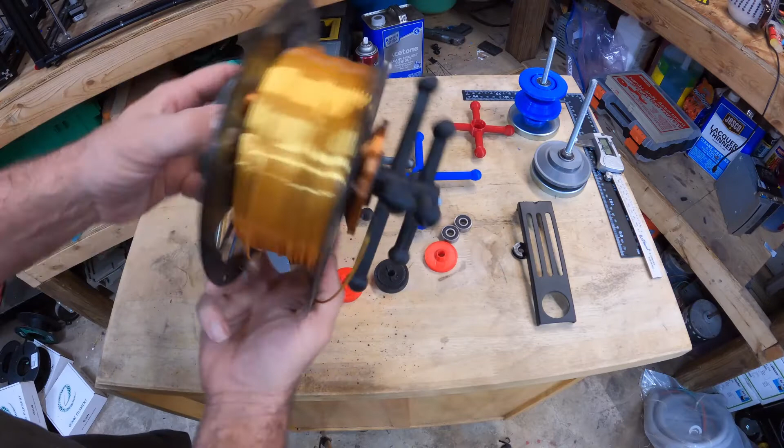So first what you see here is basically you have 3 bearings, skateboard bearings, and you have 2 spools, an inner and outer. Then you have a trim ring that holds the bearing in, and then you have 1 or 2 nuts depending on how you want to do it.

So basically, if your spool is going to unroll counterclockwise, then you need to have the second lock nut on here. What that'll do is prevent this one from unwinding. However, if you are pulling clockwise to your machine, you really only need 1 nut, and that's going to be important if you own the Plus, and we'll get to that in here in a second.

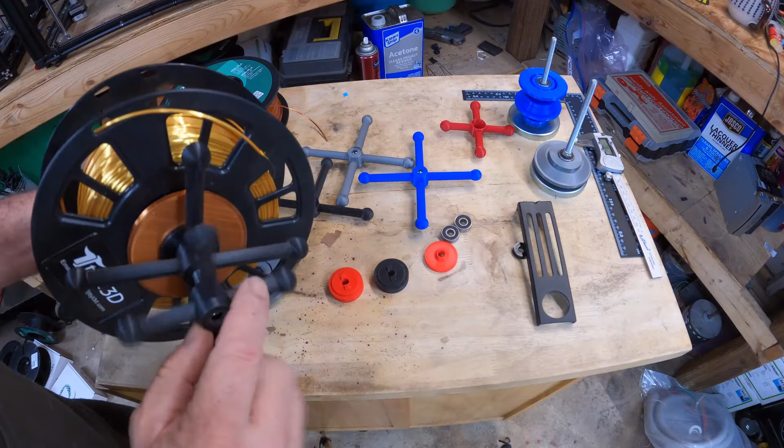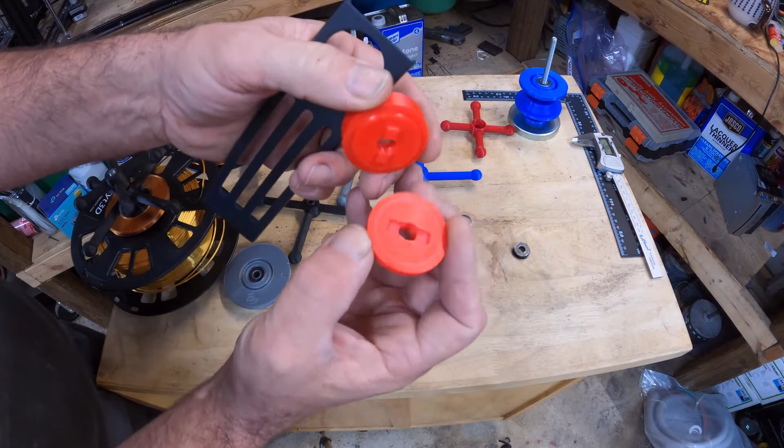So the parts you have here are, now you have the option of using this on a magnetic like I have, or on the OEM bracket. If you use it on the OEM bracket, you're going to have 2 parts. You're going to have this part and this part, and what they do is they interlock right here.

And this is not sized properly. The lip is too big, but the one you get has already been adjusted. But basically you will stick this right here, and you will put that right there, and then this will smush.

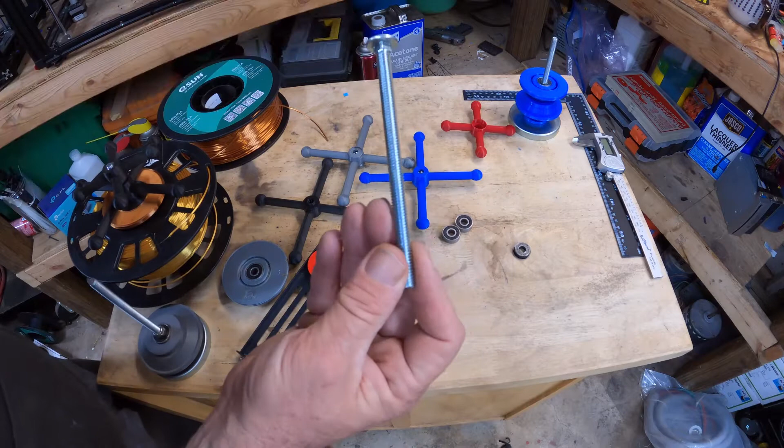And the way that'll smush is... let's back up here. So these are your lag bolts that we're using. It would be nice to have a hex head, but a lot of the ones that you find with hex heads are not threaded all the way down. They'll just be threaded on the end.

So if you're using the OEM version, not that big of an issue. It kind of fits in. You can just hold this, tighten it down, and if you look, you'll see we're using a nylon nut with a nylon stop in it.

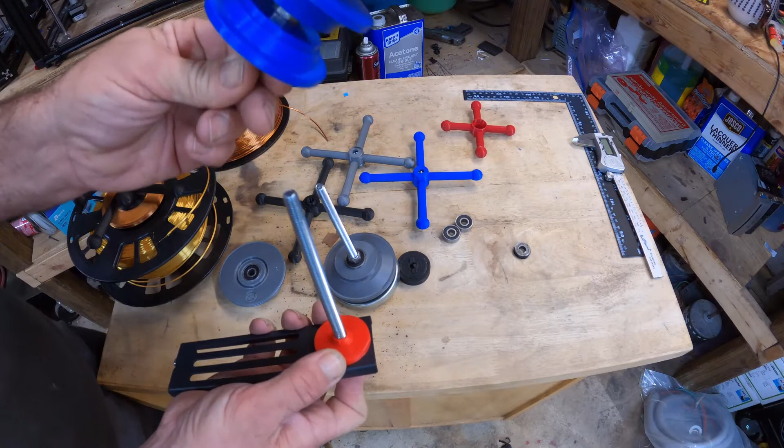If you are using it on the OEM mount, you will just put together these 2 pieces, and then you will go ahead and put a nut right here. Or you don't necessarily have to put a nut here, like I have on this one. Well, you can do it more like I have on this one, where you see I just have a piece.

This is a practice one. Your lip will not be as big, but you can see you can just go ahead and put your spool. So I don't have a spool here with 2 bearings, but basically the inner spool has a bearing on this side and this side.

So if you're doing the OEM version, you can just slide it on with your other bearing right here, and then put your nut on, and that'll sandwich it all together.

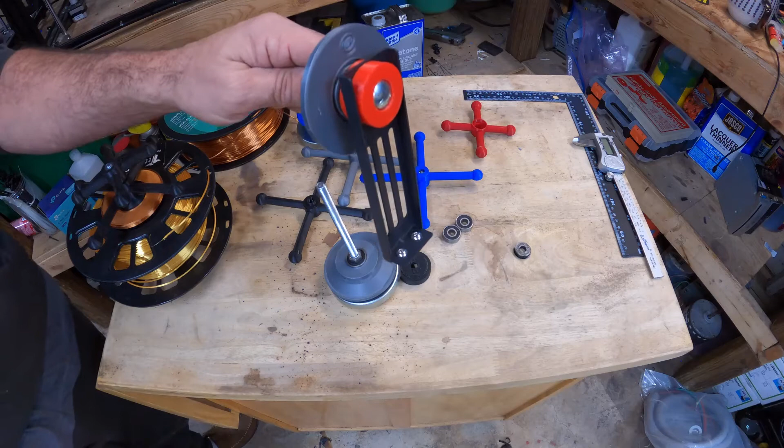Another thing about assembling these is the more you tighten this nut down, the more resistance there's going to be in this wheel. A little resistance in this wheel is probably not bad, to prevent, if the machine pulls on it real quick, you don't want it to keep

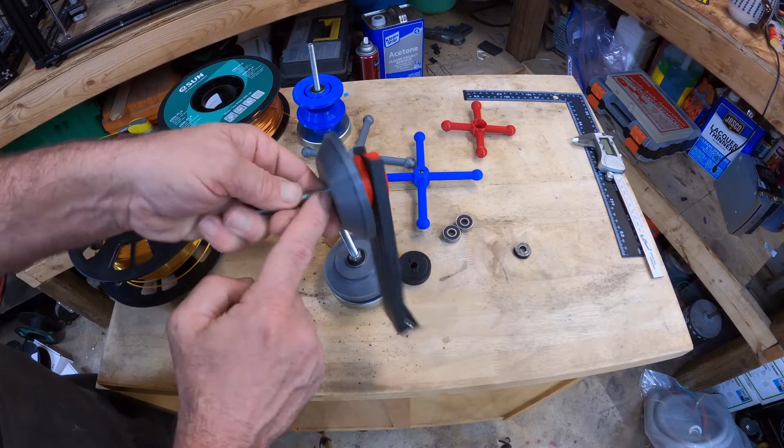unspooling the filament. So yeah, basically like this, and then you put your bearing in your nut. So there'll be a carve out on the inner for the bearing to recess down inside it, and then you put your nut. So there you go, that's your permanent part.

And then basically you'll have this, and there is a cover. I'll give you this one right here.

This video is coming down off track here. What do you want for a Monday morning video?

Alright, so you see, here you go, and there's a bearing in there, and this cap just glues on there to kind of hold the bearing in.

So you're just going to put your spool on, and this is a first generation spool that doesn't fit worth the crap. Let's just move to this one. So you'll see we fit right there, and we pop our top cover on.

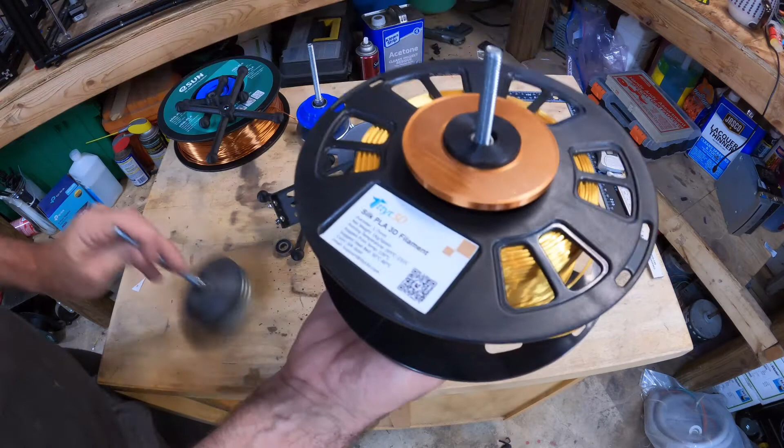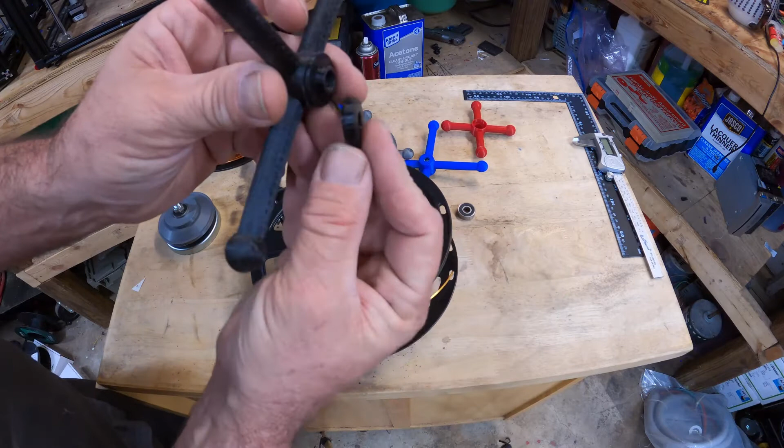Now if you look, some of the nuts, there's 2 different kinds of cap. There's a cap with a lip, and then there's a cap without the lip, and that's the way they're identified inside the folder. But this one right here, you want to have the lip go down. The lip will go down in here and push on the bearing.

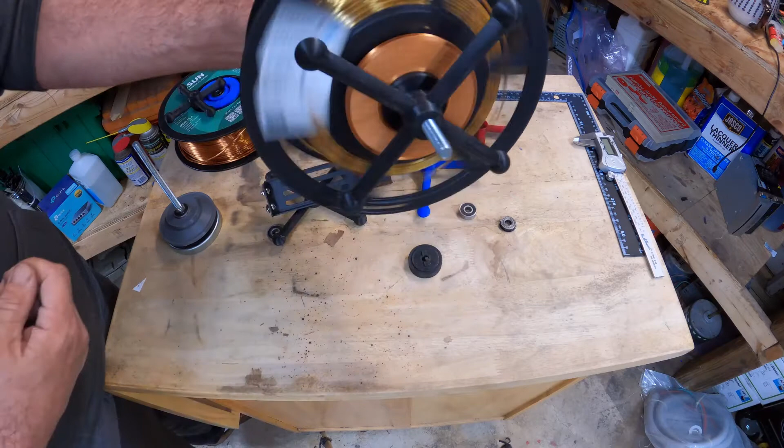And there you go. You'll see that if you don't get your bearing on there straight... and there you go, and it works pretty well. It's awesome, I love them. I have about 5 of these on my metal cabinets.

Okay, now let's back up here. So like I said, you could do it, but it's a little harder when the other end's not mounted. Just tighten up slow and wiggle a little bit when you do your last little bit, and it'll stay centered.

Like I said, if you're pulling counterclockwise, this is where you're going to want to put your lock nut on, and we would just put a lock nut on like this. This one doesn't have a nut in it. Okay, so that's just the particulars of how to assemble it.

Now there's a couple more things to consider here. One is how to print this stuff, and it's really going to matter on these. So we know that on this, we want the lip so we can go down inside of our trim ring. So when we print this, we are going to want to print this open side down, because the bottom side is going to be the ugly side a little bit where it touches the raft. And we'll give you some hints about how to print these here in a second.

Now I hate printing them like this because it makes it hard. You have to use some really good supports for the rest of this, and there has to be good density. Well, that makes it a big pain to get everything out of inside here, and you can see it can get torn up. We'll show you some tricks for that.

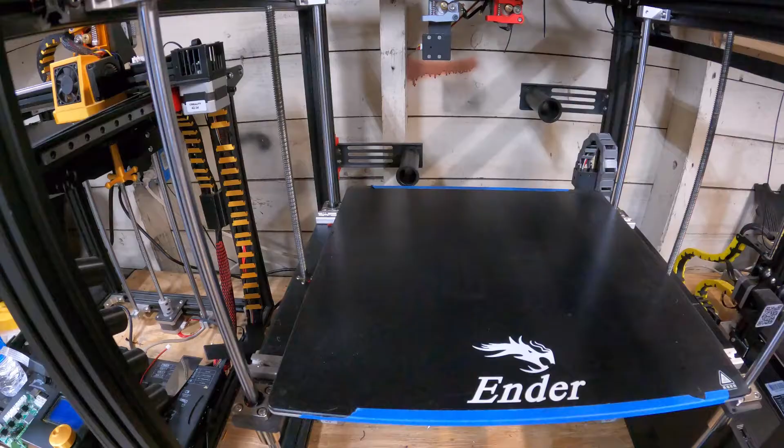Now a couple things to consider. This one requires a shorter lag. So this lag bolt right here for the one on the plus is 6 inches. The regular lag that we use everywhere else is 6.5 inches, so a 6 or a 6.5 inch. So the 6.5 inch will not fit here.

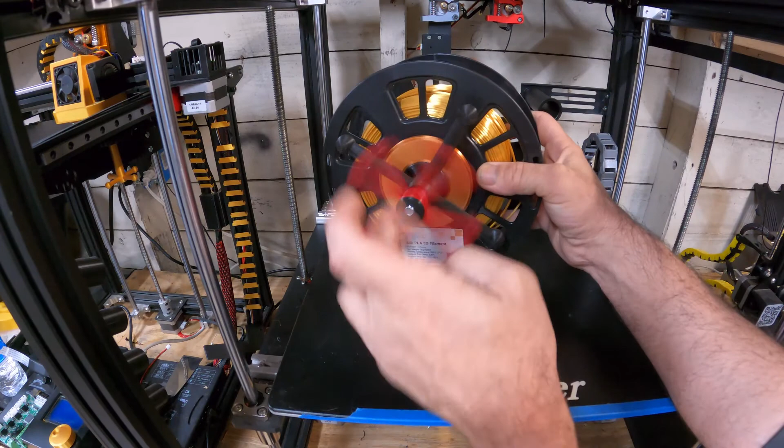I thought about adjusting this back and making this recess back the extra half inch to make it so... here's why it's a problem. With the shorter screw, you're only allowed to get one trim nut on here, right? You're only allowed to get the one nut because you're losing half an inch off the screw, and that makes it so that the second nut becomes a problem if you're winding this counterclockwise. They can unwind.

So the best thing to do on the plus for now is to make sure that your spool is feeding clockwise, so that any pressure on the nut would be to tighten it. So to do that, if we're going to do it here, we just move this extruder over, and we do the same thing over here. It's a dual extrusion machine, and we can do that on this machine.

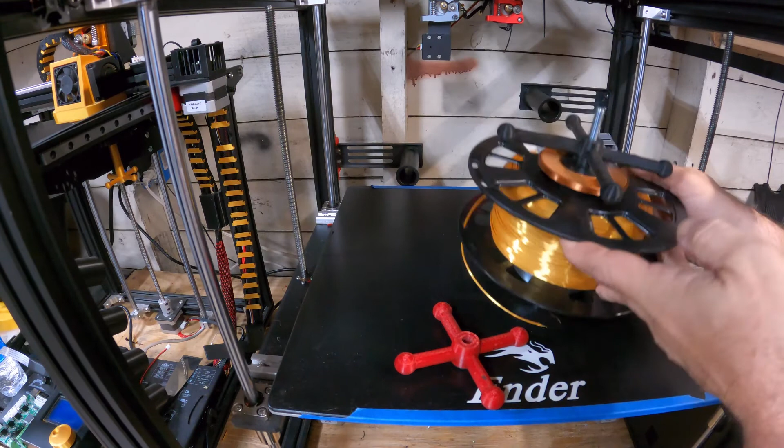Possibly, like I said, I'll redo that bracket. So I think that covers most of this. We're going to go ahead and move over to the slicer here.

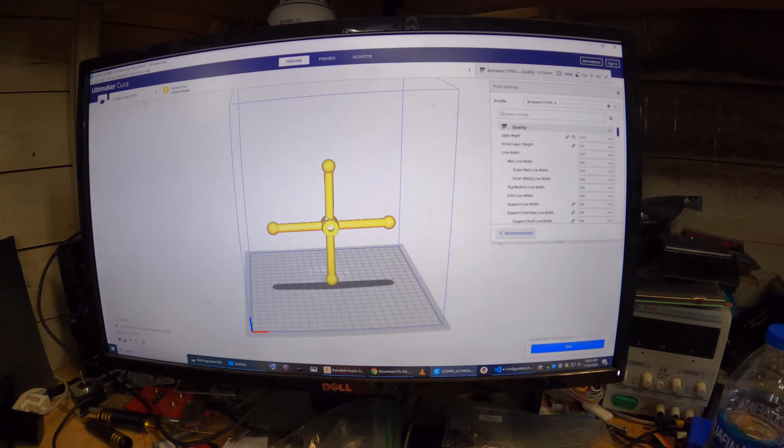Okay, we'll just go over some of the slicer settings here. I'm printing these nuts, and it's important to get them to come out pretty. So depending on how you want it orientated when finished, that'll determine what side you want down.

On these bigger ones, the 5/16 ones, I like 0.12 layer height. You could probably go to 0.2 if you really wanted to, but the higher you go, the more definition you lose and the worse the print looks.

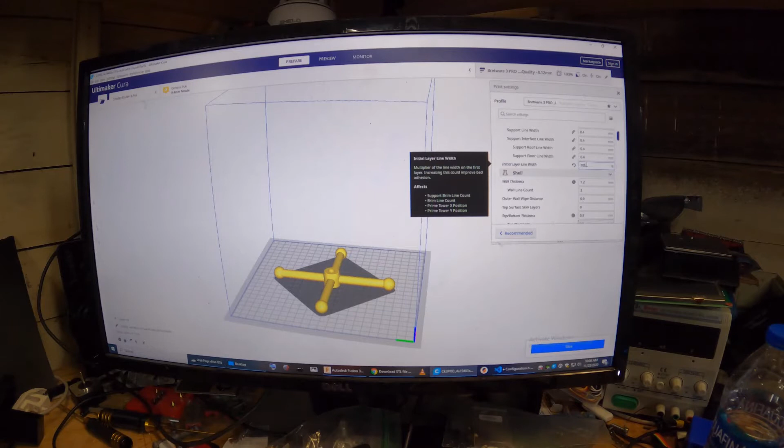On your initial layer width, if you're in the habit of bumping up your first layer width and first layer flow, you don't want to do that on top of a raft. So I'm going to lower it to 105.

On our shells, it's not going to matter because we're going to want to go 100% infill on these.

Temperature is going to be critical on these, not just the nozzle but the bed. These little balls are going to have very thin edges and they're going to be overhanging, and they're going to want to curl. So to prevent that curl, you want to make sure you don't have your bed too hot, that your filament temperature is as low as you can safely go, and that you have sufficient fan, probably moderate fan.

This is eSun PLA Plus. 205 is usually the lower end of what you can get away with printing, though that's going to slightly vary between machines. For build plate temperature, if you're used to 60, you might want to go to 50 or 55.

We're not going to do a higher initial first layer temperature since we're printing on a raft, so it's probably not as important. Our initial layer flow, again, is another one we don't want to bump up too much — 105 is where I have it. Your print speed, probably 30 to 35.

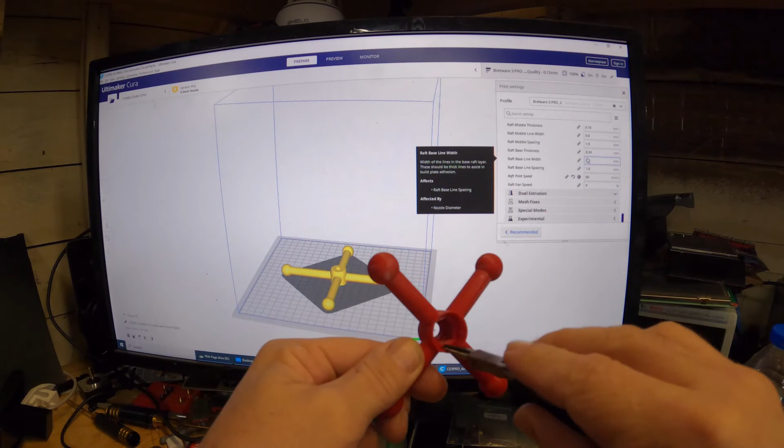This is the area that's going to have support in it, and that's going to be a big pain to remove. So I have a couple things I like to use for removing supports. One is these mini pliers — I don't know where they came from, but one side is rounded and one side is squared, and the rounded side is really nice for getting inside without damaging stuff.

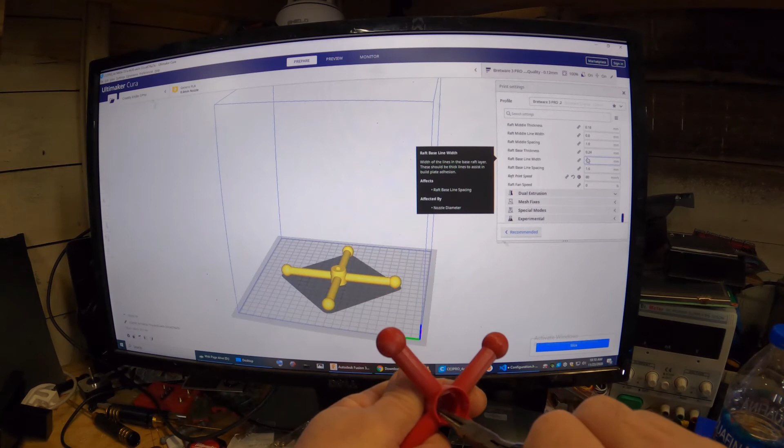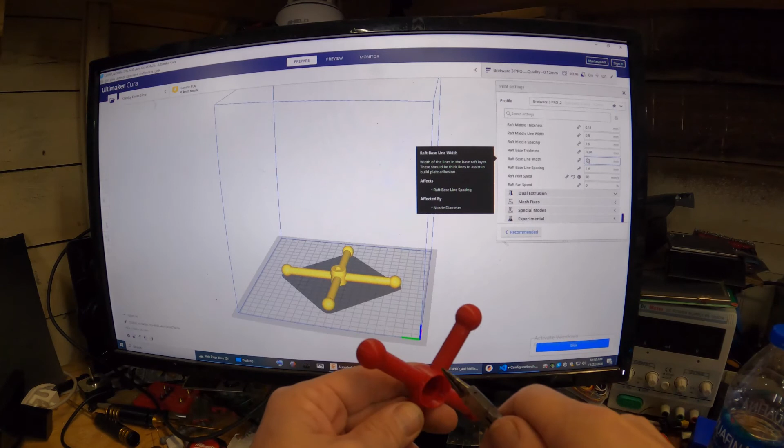What I like to do is get in here, and then we're just going to turn it, and grab it here, turn it. Basically the crushing action tends to bust the supports free a lot — just a crush, twist, and you can pop this out, and just try not to mess up this little lip.

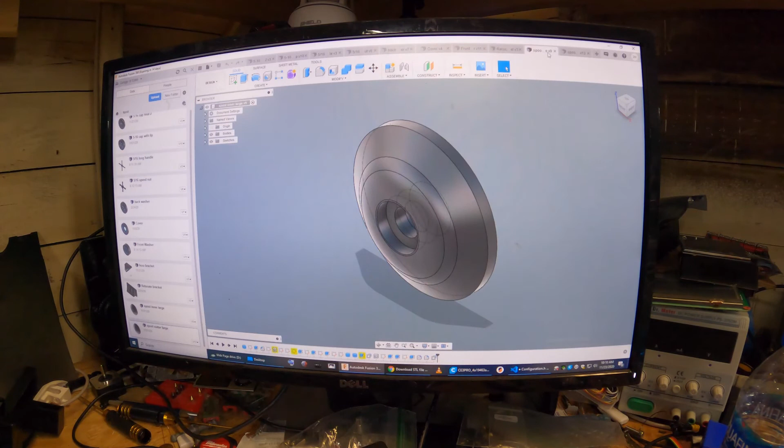Seems like there was one more thing I wanted to put in this video. Oh, there is, I know what it is — right here, let's find our pulley. Yeah, over here, our spool. So this is the outer one.

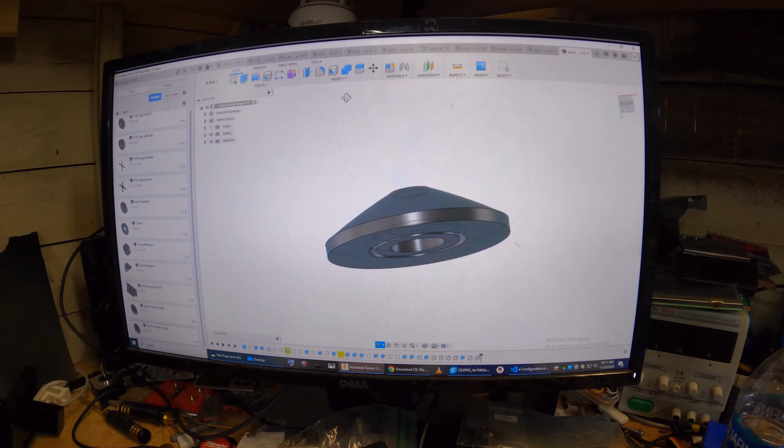Pretty much all this stuff is straightforward to print. One little thing on this right here is up inside — this is rounded up in here. So when you print this face down, we'll set this to 85 degree angle on the support, and that'll prevent support from clogging up in here, which you don't need, and you'll just have a support right here. That should just about cover everything.